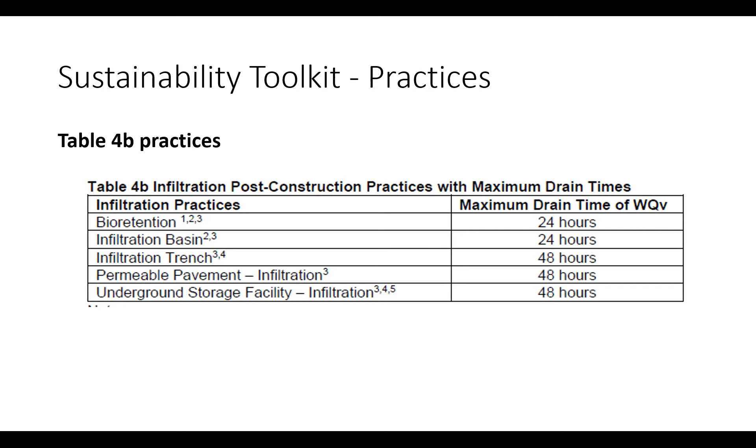If you look in the table 4B practices and the permit, what's permitted, what do we have to do when we construct? I want to point out, a lot of these are infiltration practices, and we're dealing with infiltration that goes to the surrounding area, not only just to the BMP that we're installing. Most of these are infiltration practices.

Runoff reduction methodology, if you're looking to do that on a site, again all of these are really based on infiltration. So we need to think about that infiltration. The common thing they have there is those soils.

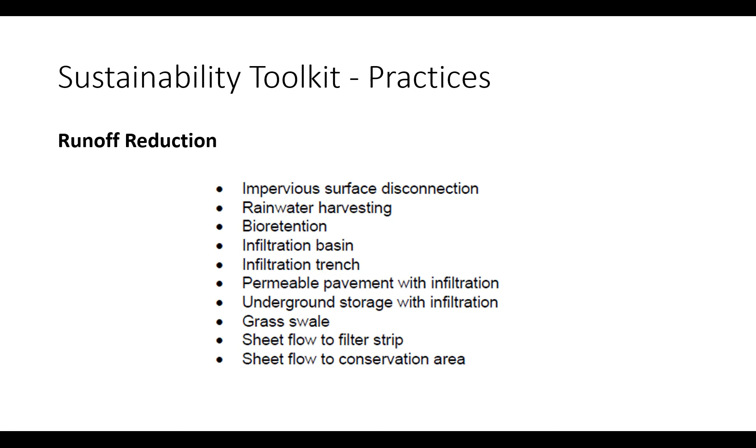What kind of soils do we have left after mass grading? Those are the kind of issues that we look at, and how can we use soils better? So with that, I'm going to drop it off to Stu.

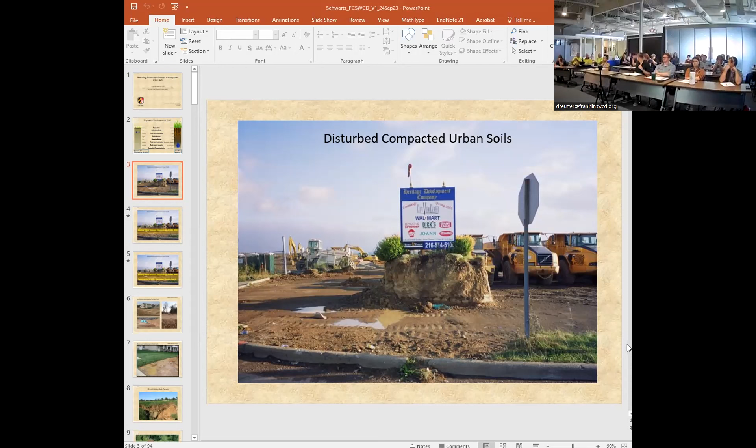Do you see this slide called disturbed compacted urban soils? Hold on a second, we're missing something. I'm just trying to talk with them without causing extra issues. Okay, yeah, we're trying to get the screen to work.

Challenges of hybrid meetings. Stu, we can see slide 3, it's not in presenter mode, but we can see the slide that says disturbed compacted soils. If I go back to presenter mode, do you see that full screen? No, I'm guessing you have two monitors and you might be presenting on the one. No, I only have one monitor. We can see it, you can still click through it this way, you'll just have to advance with the down arrow.

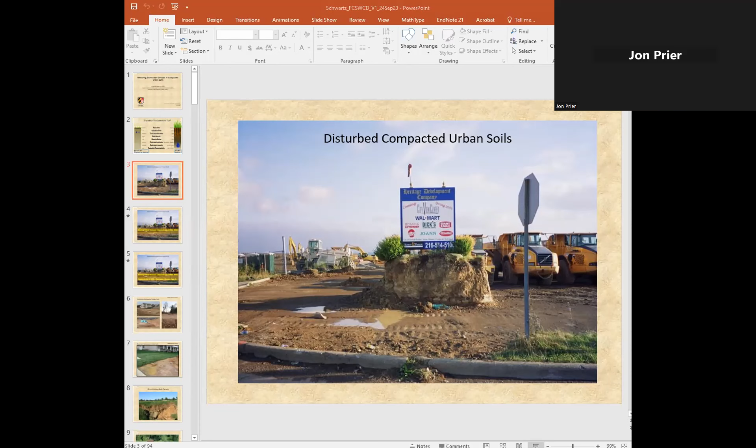Okay, give me 30 seconds to try one thing, let me put it in presenter mode. No, let's see, you need to go to the slideshow. So you're just seeing the PowerPoint window with the slides in it, is that right? That's correct. I have a feeling the problem might be that when I share the screen, I have to be in PowerPoint mode in order to see the toolbar at the bottom.

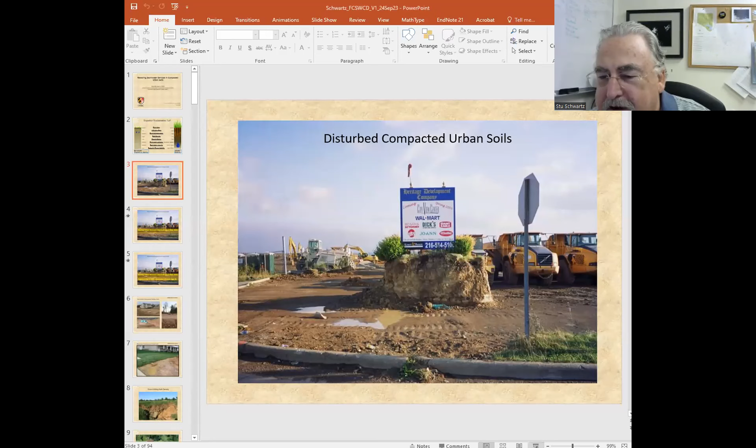Let me try it one more time. So you're able to see the slides, but it's in PowerPoint mode now? Correct. And if I go to screen share like that, you still see it in PowerPoint mode? Yes, it's not changing. I'm not sure how to remedy that. Is it large enough that you can make out the slides in PowerPoint mode? Do you think the slides are large enough? Does that help, can you click through? That's better, okay.

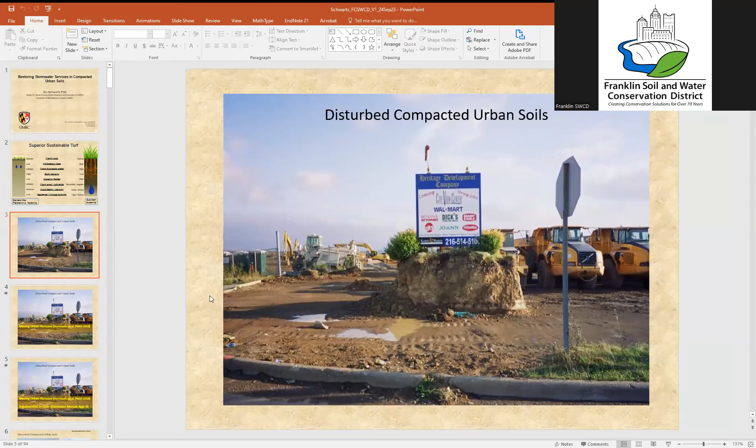Well, I apologize for the snafu, I'm not sure what's happening there, duplicate view. Just in the interest of time, is this okay if I carry on in this mode? Definitely, if we just carry on. We're getting a lot of different audio between the remote people trying to give advice as well. Okay, well, I apologize, I'm not quite sure what I'm doing wrong here, but if this will be functional, why don't I carry on? Okay, I'll take that as a yes.

I like to show this slide because it captures what I think of as typical modern land development: a small convoy of earth-moving vehicles that starts by removing vegetation and stripping topsoil, doing mass grading to meet plans before putting in improvements, and then as the penultimate step, spreading a few inches of topsoil on the remaining unpaved surfaces. For this monadnock of soil that's left, that 4 to 5 foot section represents maybe 12 to 18 inches of water holding capacity that's not just diminished by compaction, but is removed from the site entirely because of our development practices, precluding on-site stormwater controls from the start.

Even if we pave this big box parking lot with pervious concrete that can reliably infiltrate 1,000 inches an hour and has all the load-bearing strength you need, there's no place for that infiltration to go in these disturbed, compacted soils. So I've often said that modern land development is really performing an infiltrationectomy on the landscape, removing a priori the infiltration capacity of the site — a direct consequence of disturbed, compacted urban soils.

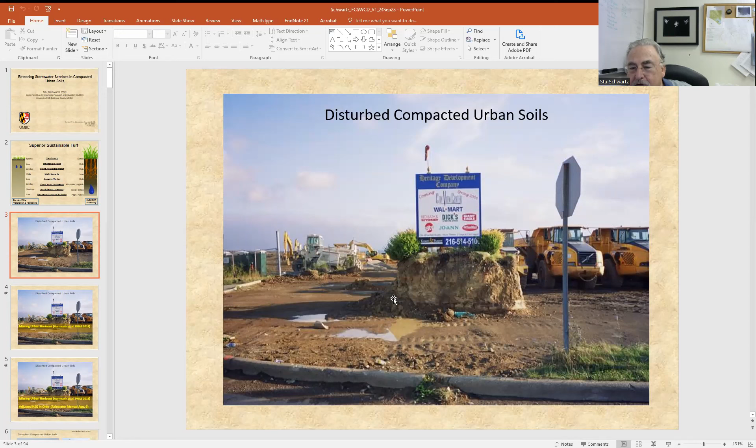For this audience, the idea that urban landscapes have a pervasive problem of disturbed, compacted urban soils is not new or radical. Many of you know Bill Shuster, who for many years was an extremely productive researcher at the EPA Cincinnati lab before going to Wayne State, where he's chairman of civil engineering. He and his colleagues published a paper in Proceedings of the National Academy of Science reporting results from doing pedology on soil cores in 11 different cities, consistently finding that urban soil profiles were missing soil horizons present in the pre-urbanization soil.

And of course, in Ohio, you guys know better than I do the need to adjust urban soil expectations due to construction, based on your adjusted hydrologic soil group procedure that's part of the rainwater manual. So I start from the presumption that talking about the problem of disturbed, compacted urban soils is nothing new, and has found a receptive audience here for this presentation.

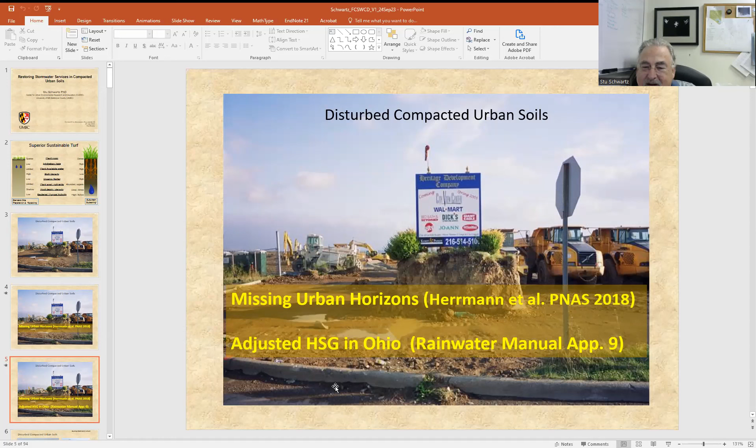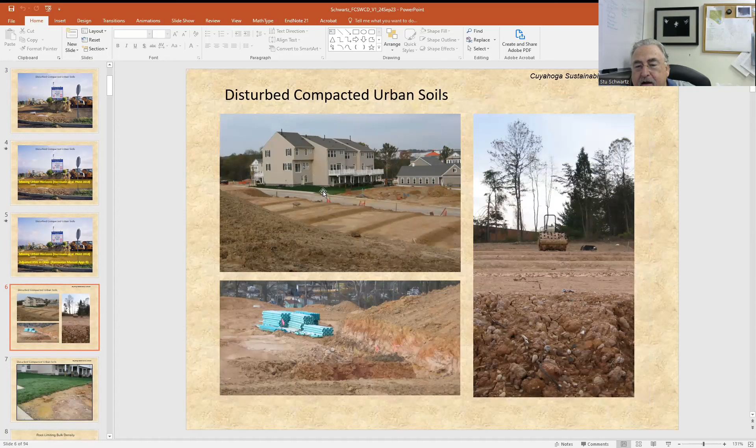We all know why that happens. It is the logical response to our standards and specs, and it's deeply embedded in our standard practices. Here's a site I visited near my office and followed construction. You can see in the upper left, even as the new compacted foundation pads are being prepared for the next round of townhouse development, this first set of townhomes are occupied.

Those owners are trying to establish their lawns, which consist of a dense, beautiful, verdant, lush cover of turf grass growing in an inch of soil cut from a sod farm. Now, you can grow a perfectly acceptable vegetative cover in an inch of sod, in an inch of soil. It's going to have very limited fertilizer and water holding capacity, so you're going to have to fertilize and water the heck out of it to keep the turf out of stress. But you can grow a perfectly acceptable cover in an inch of topsoil.

The problem is this inch of soil or so is going to be quickly saturated by just one or two tenths of an inch of rainfall or irrigation. And once that's saturated, the vertical percolation is so low that this saturated pervious land use behaves very much like an impervious surface for rainfall, producing runoff like an asphalt parking lot.

You notice this puddle in the foreground of this picture, which was taken on a day when it hadn't rained in over a week. Where's that water coming from? Well, it's coming from this sprinkler head, with the hose running back to this house, because these homeowners are just desperately watering the bejesus out of this turf, trying to keep it out of water stress and hoping it will somehow find a way to grow roots into this compacted material on which it's been placed.

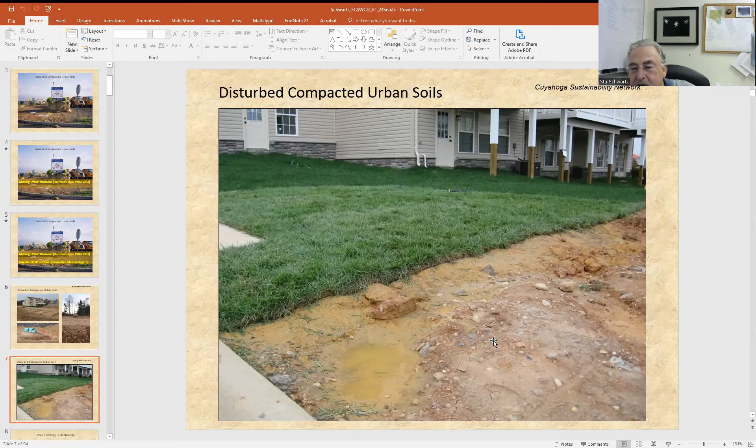And the key point is there's nothing you can learn from looking at the condition of your turf that will tell you if you're trying to grow vegetation in a soil profile that is a deep, porous, permeable profile that allows the development of deep, dense roots like this.

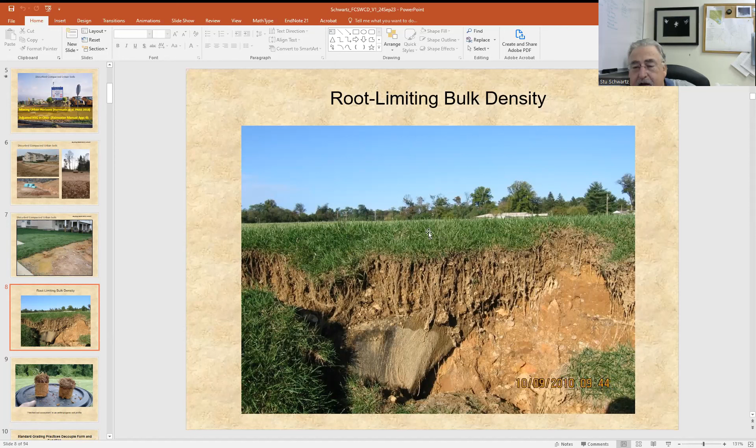You'll notice that the rooting depth on this slope failure at the edge of an athletic field is limited by the depth to contact with this massive block of compacted fill that was covered over with topsoil. But nothing you can see on the surface, nothing in an aerial photograph, will tell you if you're in this kind of soil profile or if you're growing grass in this kind of soil profile.

We were really dumbfounded when we took these cores from the grassy field you see in the background, to see that the entire root zone and virtually all the biological soil processes and most of the hydrologic processes are confined to these little muffin tops that literally lifted right off of the amorphous compacted fill beneath them. So this is sort of my mental picture when I talk about grass growing in a thin veneer of topsoil on compacted fill. We see this, and we see this commonly.

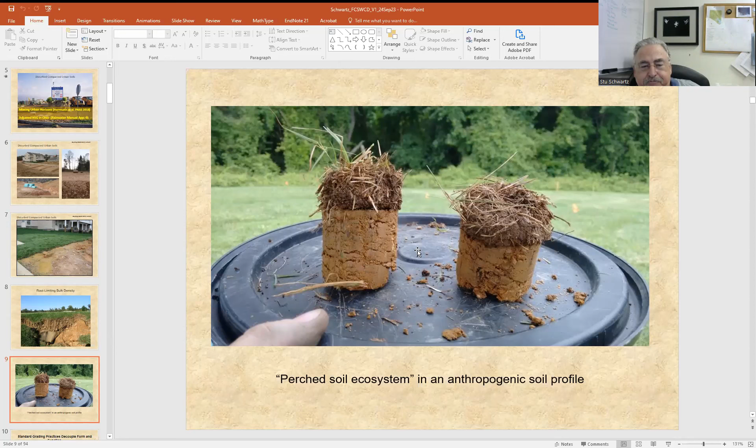Excuse me. It's not an unknown phenomenon, far from it.

This is a quote from Chapter 7 of the National Engineering Handbook, and I think in some ways it's one of the most significant and one of the most overlooked qualifications in the National Engineering Handbook, reminding us that there is no supposition about the hydrologic properties of disturbed soils that can be made from the natural soils. When we're dealing with disturbed soils, an on-site investigation should be made.

So what that's really saying is that for most cases, the information in the soil survey or in the national soil databases like STATSGO2 and SSURGO are not reliable predictors of the properties or the hydrologic functions we should expect from disturbed, compacted urban soils. And of course, the Ohio construction adjustment procedure is an attempt to address just this issue, and there are other attempts in other states as well.

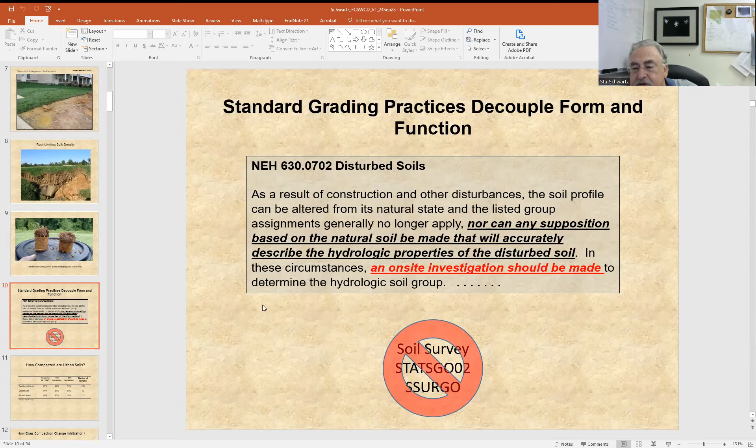But the basic problem here, I would suggest to you, is disturbed, compacted urban soils. Well, if on-site investigations are needed, on-site investigations you shall have.

So we spent several years doing field work in which we sampled more than 300 residential yards, more than 70 vacant lots, and a number of recreational athletic fields to ask how compacted are urban soils.

What we found is that the vast majority of the soils we sampled had a bulk density higher than what we call native bulk density—the bulk density we would predict based on the texture and organic matter of the soil. Not only was the bulk density higher, but the vast majority of those urban soils had a bulk density that was more than 5% higher, and the majority had a bulk density more than 10% higher.

Now, if you're not used to thinking about bulk density and infiltration, you might say, how big a deal is that? What difference does a 10% increase in bulk density make?

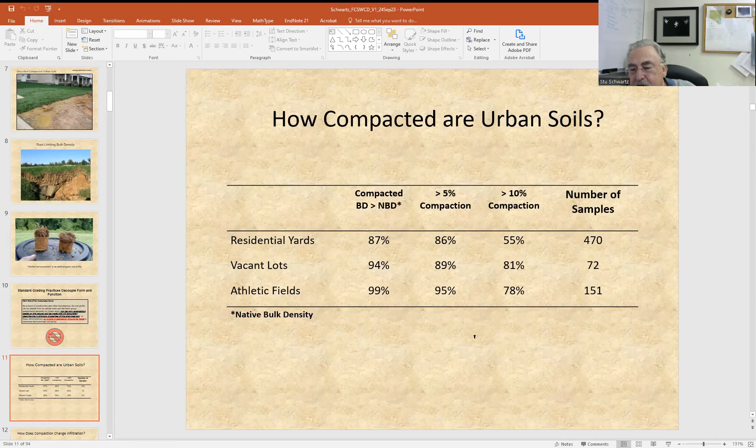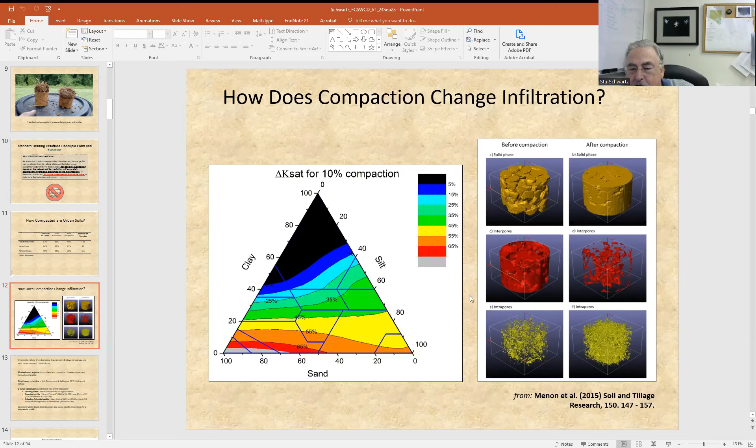So with that picture in mind, it's really important to understand the dynamic transitions between saturated and unsaturated conditions. Now, that's a real contrast to many of our standard...

infiltration-based BMPs, where we have a large drainage area being collected in a small footprint, ponded water where we expect to saturate the soil, and the design parameter that controls the water leaving via exfiltration is the saturated hydraulic conductivity.

But soils are not that often in saturated conditions; they're constantly transitioning between saturated and unsaturated conditions, where the moisture content controls the conductivity of the soil. So it's vital for us to understand that.

We tried to understand that by doing soil physics modeling of soil profiles, informed by our field work. To do that, we defined a couple of what I think of as typical endpoints across the spectrum of soil profiles.

We might have a healthy soil profile, which we idealize as an uncompacted soil at native bulk density with 5% organic matter. We call our disturbed profile a topsoiled soil profile, where we assume the profile has its bulk density increased just 10% at 0.5% organic matter, but the top 10 centimeters of the profile has a soil layer at native bulk density and 3% organic matter, which is a typical spec for topsoiled soil. Then we simulate the effect of a process we call suburban subsoiling, which is deep ripping and compost amendment, which I'll talk more about in a minute.

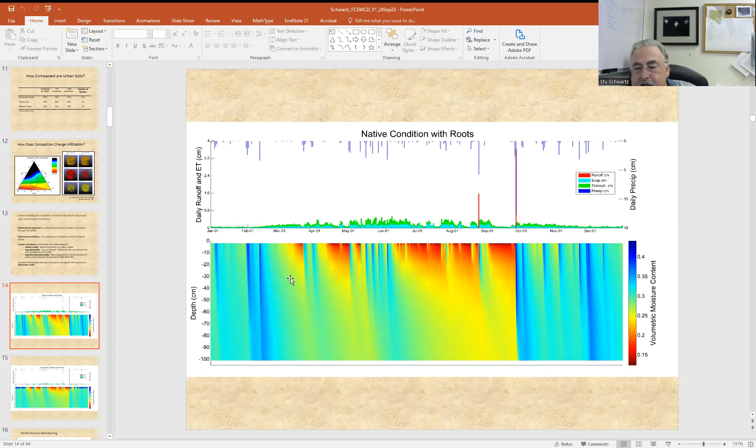When we simulate the same meteorological sequence, we see some similarities and some differences. We see the similarity of that intense drying during the growing season, punctuated by rainfall events. But now, since the root zone is only 10 centimeters deep, it's much easier for the plants to exhaust the soil water, to dry it out much more rapidly, because there's just less water to draw on. And that modest 10% increase in bulk density in the soil profile is enough to prevent even the saturated conditions that develop so quickly when you're only trying to saturate 10 centimeters of soil. It prevents them from having higher percolation into the rest of the soil profile. So that high rate of transmission at the saturated conductivity isn't occurring, and we're not getting that deep soil moisture recharge.

And of course, because it takes less rainfall to saturate the top 10 centimeters, there's more rainfall for runoff. So now, instead of having 2 runoff events, we actually have 10 or 12 runoff events scattered throughout the year.

And it's not obvious, but the scale here has changed. The runoff from this event in October has increased by a factor of 3. So our disturbed, compacted soil profiles are giving us more runoff, less total infiltration, and more intense drying and wetting in this vegetated root zone.

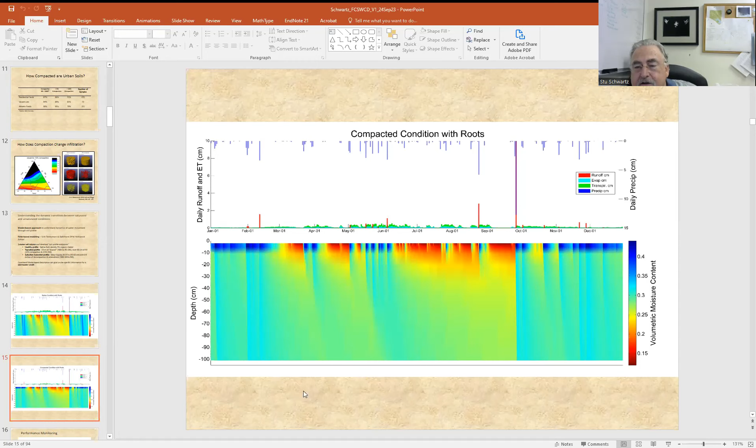That's our mental model based on a soil physics model. So in our projects we instrumented the soil profile with a vertical array of soil moisture sensors at 3 different depths. These are data from one example, where the lower plots show the soil moisture at 4 inches, 9 inches, and 14 inches below the surface. The upper layer shows the soil temperature.

The shallowest soil temperature, 4 inches, shown in light blue, shows that high frequency variation. That's just the diurnal temperature cycle, which is still clearly detectable at 4-inch depth. But notice that...

In this plot, from November 2020 until March 2021, soil moisture stays uniformly high. It never drops below about 32% volumetric soil moisture. The 4-inch soil moisture, in dark blue, responds to rainfall events, wetting up and drying down, but still never falling below that 32% volumetric moisture content during the dormant season.

Even as the soil temperature starts to rise from 5 to 10 degrees centigrade, the soil moisture stays relatively high. It's not until April, when vegetation really gets active, that the soil moisture starts to dry out. We see that progressive drying punctuated by rainfall events through the growing season until we get into fall.

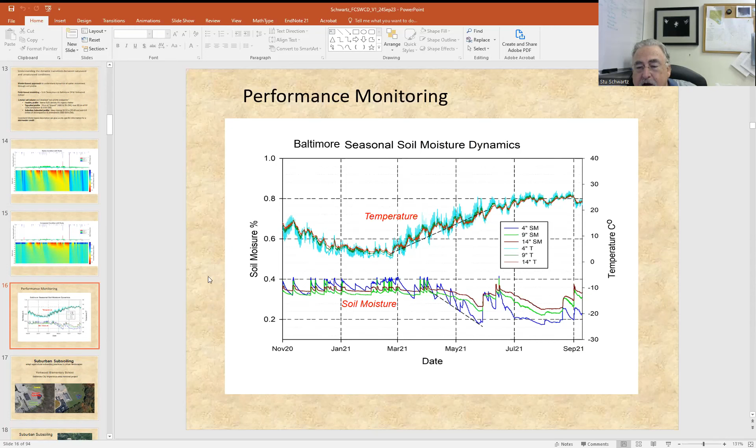So the question is, what can we do about it? We've been working on a family of soil decompaction and amendment practices that we call suburban subsoiling, alluding to the fact that we started by adapting knowledge from agricultural subsoiling practices to the urban landscape.

This was an early project we did with the city of Baltimore at the Yorkwood Elementary School. The city of Baltimore, like most cities and most DOTs, has an MS4 permit, and their MS4 permit gives them credit for impervious area removal. So they entered into an innovative program with the Board of Education to go back to old public schools like this one and remove their asphalt playgrounds, replacing it with grass as a pervious land use, to get impervious area removal credits.

We were very fortunate to partner with the city of Baltimore, and I credit Bill Stack, when he was still with the city, for this: half of this field was treated with standard topsoiling practices based on the standard city spec book, while on the other half we were able to implement suburban subsoiling.

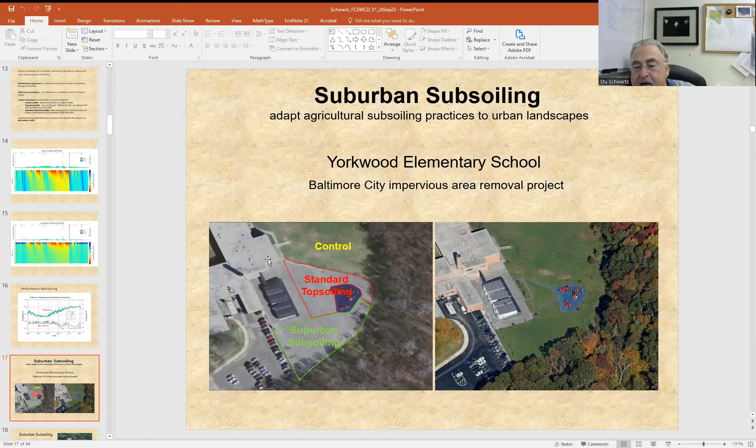Suburban subsoiling basically consists of deep ripping to a depth of at least 20 inches, to break up and decompact the massive structure of the compacted soil profile, followed by surface application of 2 to 3 inches of compost, which we try to incorporate to a depth of 6 to 9 inches in order to achieve a 2-to-1 soil to compost ratio.

Many of you will recognize that getting 9 inches of incorporation with a rotary tiller is not an easy task, though lots of folks will say, oh sure, no problem. It's really something of a challenge, and we can talk about the means and methods later if that's of interest.

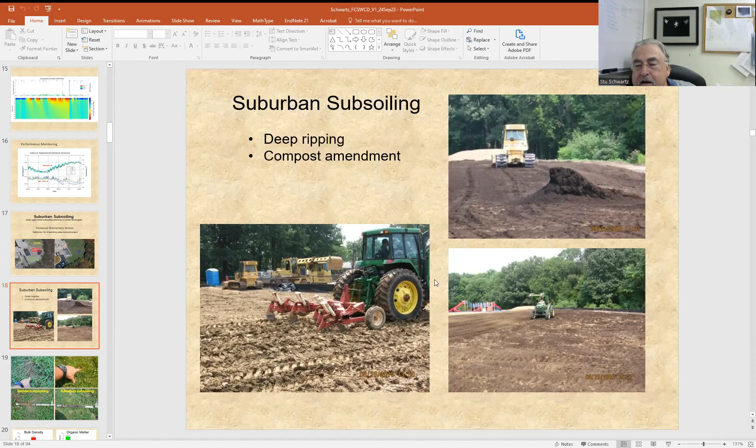We established these two different treatments on the field. The field was then hydroseeded with the same seed mix at the same time. Within a short period, we saw dramatic differences in turf cover quality. On the standard topsoiling half, the cover was spotty, irregular and thin, and became dominated by opportunistic clover and broad-bladed rhizomatous crabgrass.

On the suburban subsoiling half of the field, we had a really dense, lush, verdant turf cover with more than twice the standing biomass as the standard topsoiling side. We credit that to the turf being so vigorous that it largely outcompetes the weed species.

We credit that to the differences in the soil profile. You see below in these soil probes the depth of compost incorporation on the suburban subsoiling field that added organic matter, compared to this thin humic layer in the material left after the asphalt playground was removed on the standard topsoiling side of the field.

And of course, we're at a university, so we monitor performance. These are some data from 3 years after preparation and construction. From left to right, I show our suburban subsoiling data, the standard topsoiling data, and there was a third field left untouched, not exactly a control, but as a reference site.

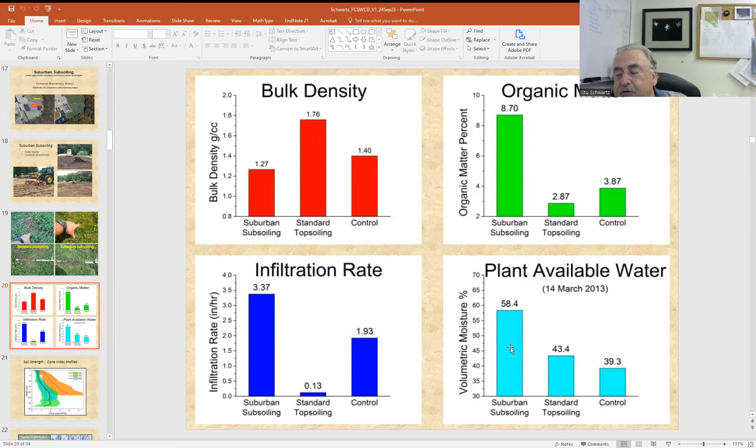But also equally interesting is much higher plant available water, which tells us we've created a soil profile that not only gives us an order of magnitude increase in infiltration, but the rainfall infiltrated is being held and retained in the soil, in those macropores, and is available as plant available water to give us a much healthier, vigorous, drought-resistant, deeper-rooted turf grass on the suburban subsoiled half of the field. Again, just to emphasize, we attribute this to the differences in the soil profile.

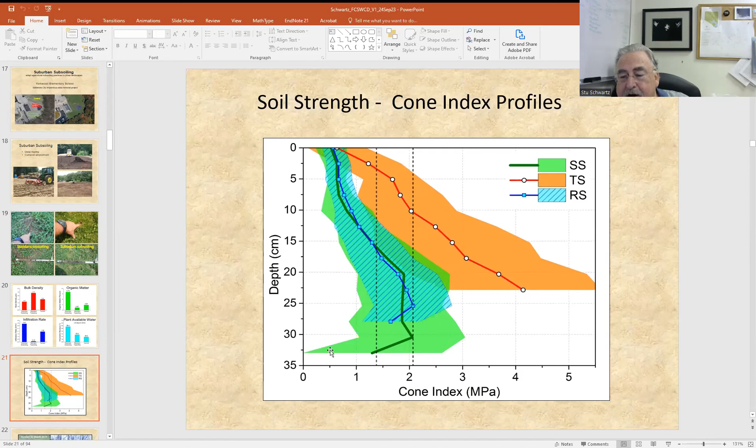In some ways, the proof of the pudding is in the eating, as they say. 4 years after the work was done on these fields, I came out on a spring Sunday afternoon when we were having a typical spring storm here in Maryland, a 24-hour storm that delivered just about 3.2 inches of rainfall, which is the textbook definition of our 2-year storm.

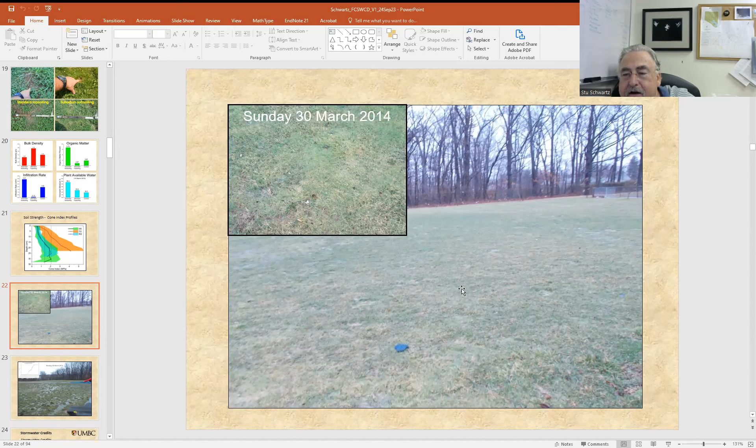On the suburban subsoiling half of the field, there's not really much to see: a very uniform, dense cover of turf, but no puddles or ponding, no rills or sheet flow. The suburban subsoiling half of the field was able, 4 years after being developed, to fully capture and infiltrate the 2-year storm. When we looked at the standard topsoiled half of the field, a very different look indeed.

We estimate that this half of the field is producing roughly 30 times more runoff on an annual basis than the suburban subsoiled field. But ironically, both halves of the field earn the same credit for MS4 purposes. The reason for that is the MS4 credit is based on impervious removal, based on the absence of impervious area, not the amount of infiltration or runoff reduction that's been restored.

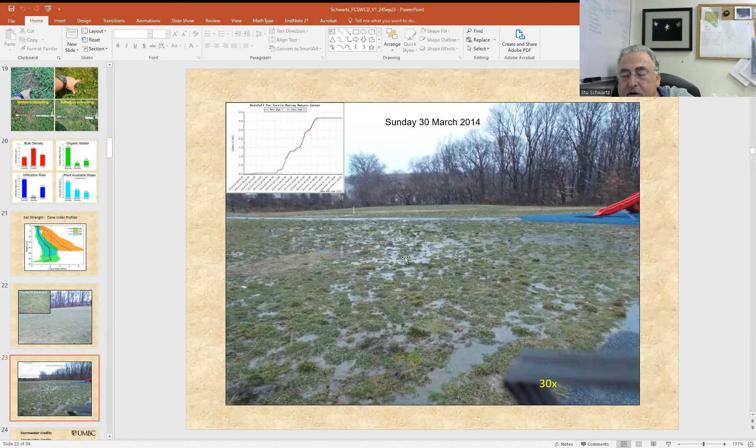So the current regulatory standards don't really provide a direct incentive for either the contractors or the developers to use suburban subsoiling. To us, that suggests an opportunity to change the characteristics, particularly if we can develop a consistent, reliable, reproducible way to quantify the stormwater credit that soil decompaction and amendment should have. So we set out to do that, again relying on our confidence in our soil physics model. Using a soil physics model makes it much easier to examine different soil profile endpoints, healthy, topsoiled, and suburban subsoiled profiles, and to examine different soil profiles for different soil textures.

So we were able to repeat the family of simulations like those I showed you for each of these soil profile types, for every soil texture. And when we do that from each simulation, we can pull off the individual rainfall runoff events from the simulation. These events are described by the storm event rainfall, P, and the storm event discharge, Q, and we can plot these PQ pairs as storm event rainfall and storm event runoff, which is exactly what curve number hydrology is interested in.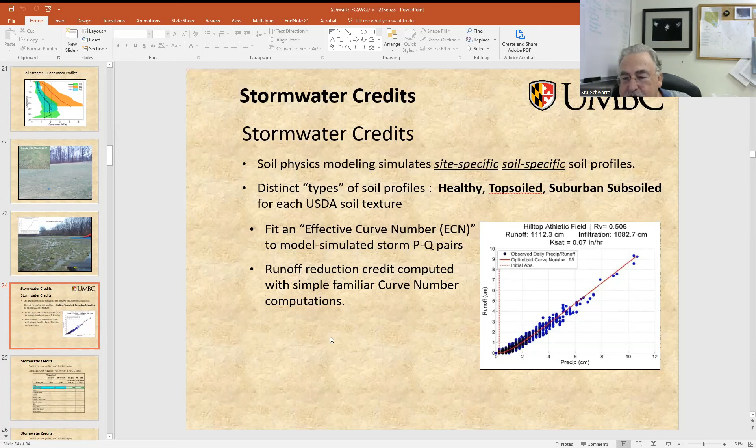Now, my recollection is that 9/10ths of an inch is the precipitation used to calculate your water quality volume in Ohio, and correct me if that's mistaken or no longer the case, but this would suggest in a rough and ready way that just decompacting the soil might be enough to meet your water quality volume requirement.

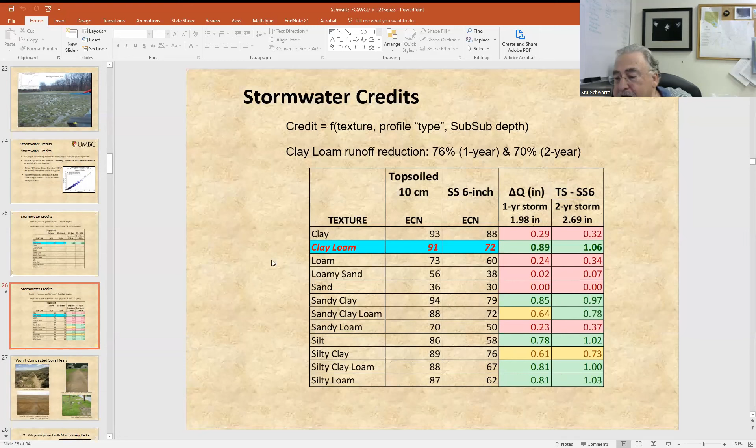We expect a compacted clay soil to have even less infiltration, but decompacting a compacted clay soil is still going to leave us with a clay soil with relatively low infiltration, so the expected runoff reduction is going to be relatively small. The green textures are textures where we might expect the greatest runoff reduction from soil decompaction and amendment. The key point is that by characterizing these in a reproducible way, with an effective curve number for compacted and decompacted profiles, we allow designers to do standard design calculations with stormwater curve number hydrology, and make value engineering decisions about how this practice fits into their overall site plan compared to other BMP practices. It gives us a consistent, reproducible basis to quantify a stormwater runoff reduction credit.

I want to wrap up by addressing a question I often get: won't these compacted soils heal? Why do we have to worry about compacted soils? After all, vegetation is putting roots into the soil every spring, and in the winter we have frost heaving that's going to break up the soils. So why do we have to worry about compaction?

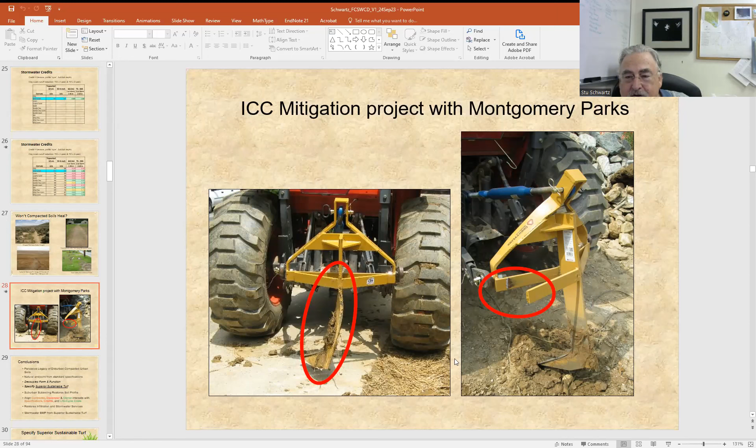So particularly to my good friends who are fans, as I am, of urban forestry, and who claim to me how tree roots will decompact our compacted urban soils, I like to point out that this 3/4-inch steel shank didn't stand a chance against the kind of compacted soils we've routinely seen in the built environment, and if you really want to decompact these soils, proper means and methods and significant intervention are really going to be required. On that note, let me conclude.

Hopefully I've helped you warm to the idea that there's this pervasive legacy of disturbed, compacted urban soils that affects infiltration, rooting depth, and vegetation success. But it's the natural endpoint of our current standards and specifications that has the effect of decoupling the form and function of the landscape.

So if we want different outcomes, we need to specify different practices, and specify what I call superior sustainable turf that can be established through suburban subsoiling.

We've really been trying to devote a lot of our work not just to specifying the practice, the depths, and the compost criteria, but really trying to advance the institutionalization of this by developing a credit system and developing a specification.

The key to making this work, I think, is to align the interests of contractors through the specifications we give them, align the interests of developers by providing reliable credits, and align the interests of landowners to help them understand the superior life cycle costs and reduced irrigation and fertilization required for a vigorous landscape.

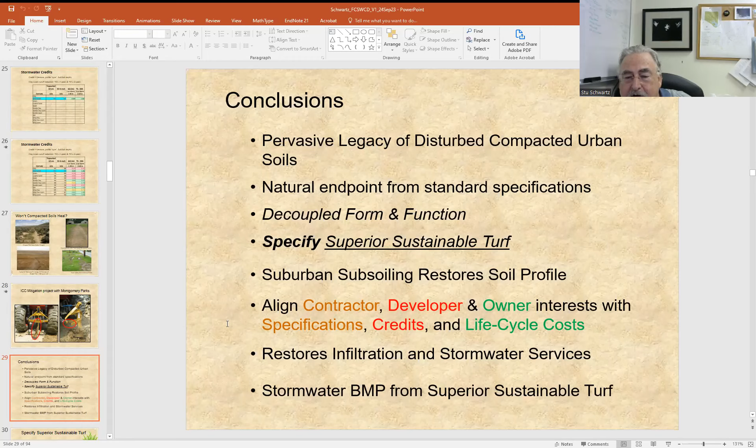If we do that, we think we can deliver superior sustainable landscapes of deep-rooted, densely rooted turf grass that will recycle nitrogen and organic carbon in the soil profile, and also provide a cost-effective BMP from superior sustainable landscapes. So keep this image in mind, and that's really what we're talking about.

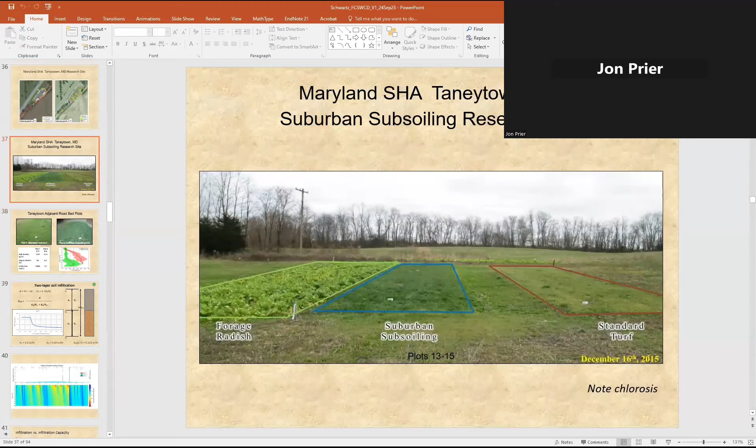Yeah, sure. So it's not that big of a deal or anything, but we've tried to plant lots of natives. We'd all prefer deep rooting grass that's easier to maintain, you have to mow less. That all sounds great. We have lots of wildflower patches we've tried to promote for monarch butterflies and bees and whatnot, pollinators.

The projects I've been involved on that have tried natives, effectively on a typical construction project, they throw down their temporary seed and some permanent seeding, and it may not come up very well the first year because they have so little topsoil or such poor growing conditions. But basically, if you mow it 2 or 3 times a year, eventually it'll turn into turf grass.

With the native plantings, the prairie plantings, just like if you look at anyone developing prairie science or that kind of thing, it takes a few years. You got to get rid of everything else growing there and get the natives growing. Effectively, at the end of a construction project, a contractor can throw some seed down, and eventually just by mowing, it'll turn into turf grass that looks acceptable.

If you want natives, it's another 2 years of messing around in there, touching the site again, 3, 4, 5 times a year, at least 2 times a year, trying to use herbicides to kill some plants and get the natives to come up. So it's not a seed cost thing. It's not even directly a cost thing. It's the ability to stay at a site 2 years after construction's finished to try to get natives to grow.

So I completely agree with all the subsoiling, the ripping, and the compost. We're doing a lot of that stuff at ODOT, but the natives, you got to really want it if you're willing to get in there and get the natives to grow. It's not a plant selection issue, it's not a cost of seed issue. It's a big extra cost of time and resources to establish those prairie plantings.

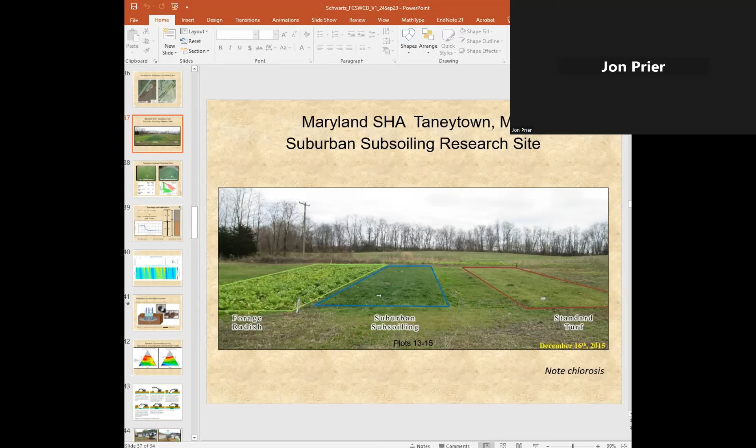Well, thank you. It was really a pleasure, and sorry to be such a blowhard in amplifying the points. You handled our time nicely, and we appreciate that.

I did get a last minute note. So, implementing deep ripping or suburban subsoiling as described can be a challenge for landowners on heavily developed sites, with underground utilities, building foundations, things like that. Are there recommendations for improving soil permeability in these situations.

Yeah, well that's a great question too. Some work I didn't talk about, but we were really sensitive to the fact that having a 75 horsepower tractor and a ripping blade is not something you're going to bring out to someone's front yard, especially think about the row houses in Baltimore and so on.

So we actually developed some small footprint practices. We took a practice called complete cultivation that was developed by British Forest Research, the equivalent of the research arm of the Forest Service in the United Kingdom. They developed practices for decompacting soils for reforestation success on open pit mines and abandoned quarries. It's essentially a kind of double-digging process.

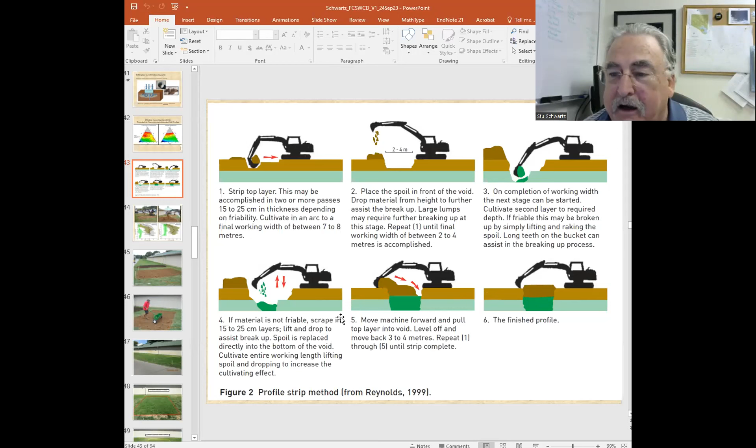This is a practice they've developed, and they've had tremendous success with it on strip mines and abandoned quarries. We tried to adapt it to a 10-foot by 10-foot plot. This was at the Biocycle conference back in 2014 as demonstration plots using a little rubber track mini excavator. Going strip by strip, they double dig and decompact this, and you can see the difference in the cone index profiles for the decompacted plots compared to the standard plots.

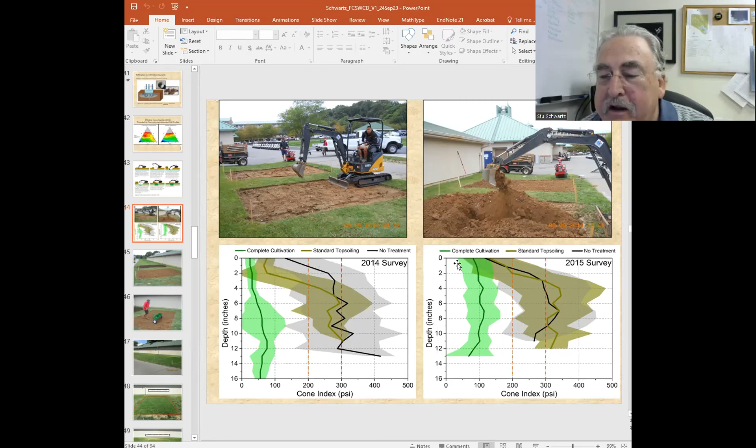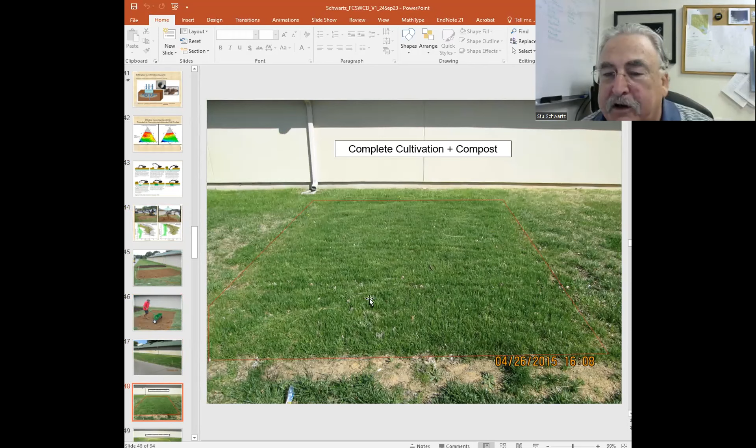This is sort of what they looked like when they were done. They were seeded, and one thing I'll point out is the complete cultivation plot with compost developed this lush, verdant turf cover. The standard plot next to it, which just received standard treatment—rototilling, seed, fertilizer and mulch—didn't have nearly the density or completeness of cover.

You may notice the difference in color of the plot. This standard turf plot is showing signs of chlorosis, of nitrogen deficiency that I was talking about a moment ago, because once that little shot of starter fertilizer for the germinated turf gets consumed, it's growing in this relatively infertile fill soil. Whereas the suburban subsoiling soil has this deeper, porous, permeable profile loaded with organic nitrogen and organic phosphorus that's slowly being remineralized and made plant available, being recycled by the soil ecosystem.

But we did it in this spot in particular because there's a storm drain running directly down the middle of this plot. By marking that, we wanted to show that a skilled equipment operator could do this practice working around the storm drain, and that it would be practical to do in a residential yard if you were really motivated to decompact your soil.

So there are small footprint practices available for people who are motivated to do that on something the size of a residential yard, where you can't bring in a tractor.

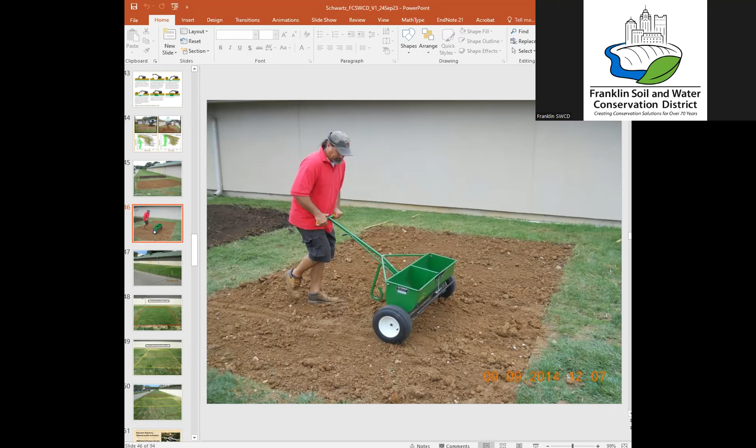And for the rest of you, you can enjoy a little pizza now. That's what you miss when you come here in person. So thanks again, Stu. Thank you, Stu. We can talk later. Yeah, thanks very much. Pleasure to join you. Thank you.